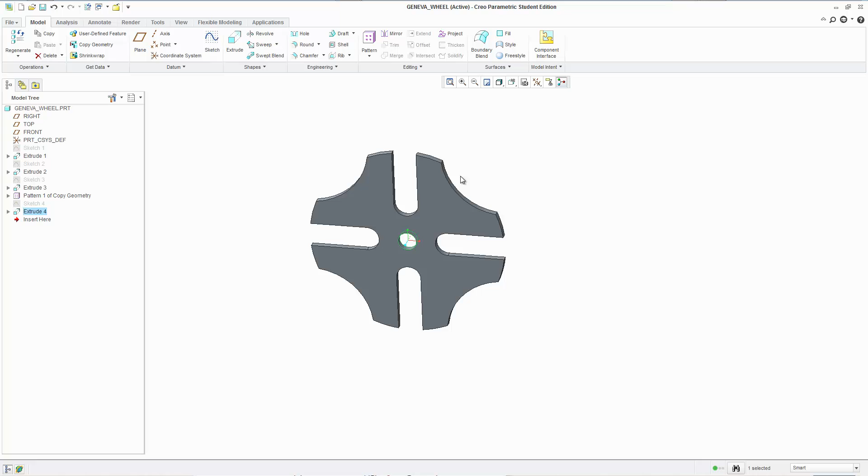And we're back. So this is part 2 of making these two wheels for the Geneva mechanism that we're gonna make. Again, I'm not gonna assemble it like this just yet. We're gonna do it definitely. So if this is something that looks interesting or fun to you, we're definitely gonna get to it.

And it's gonna be in the assembly series, and I'm gonna show you some other stuff too. I think we talked about doing motion skeletons. I'm going to show you how to do those as well. And if you don't know what that is, don't worry about it. But if you have done SolidWorks before and you're doing Creo, motion skeletons in Creo are what sketch blocks are in SolidWorks. So it's essentially the same thing.

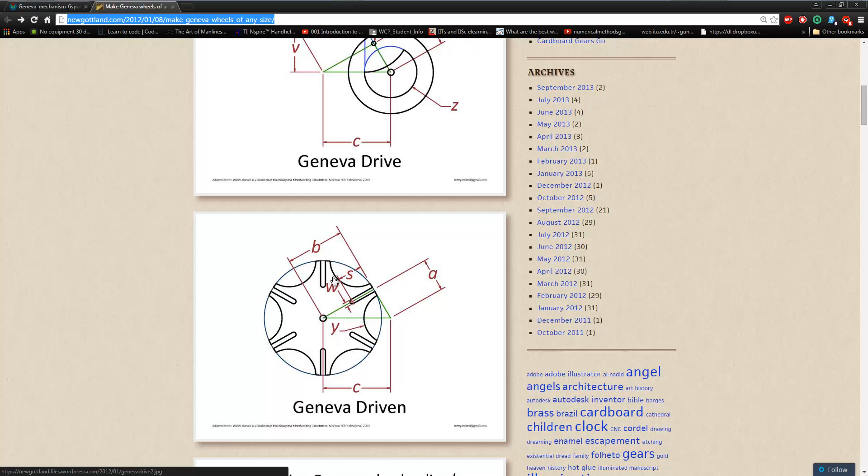But let's get to this. So now we're going to make the drive. I already have the dimensions calculated, I'm going to mention it again. This website is where I got all the equations for the calculations, just follow it along. I'm going to link it in this video as well. I've sent these people an email just telling them that I'm using this website. Hopefully they don't get angry, because they got some nice stuff here.

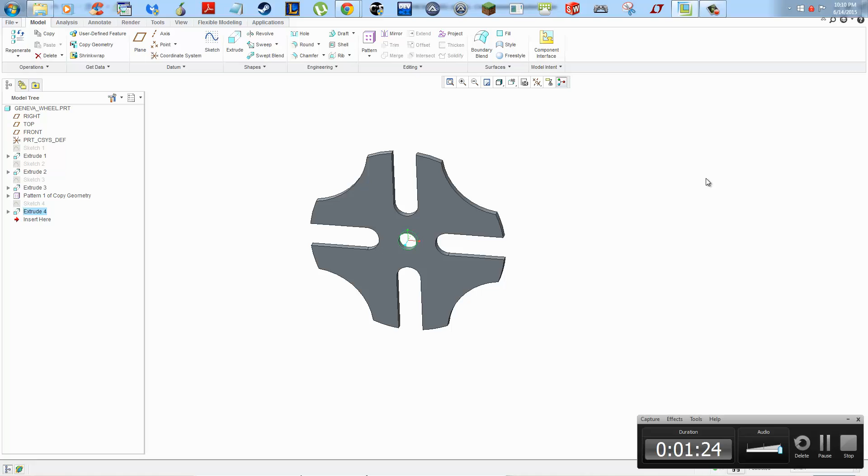Alright, okay. So that's not, alright, there we go. Minimize, let me just get rid of this. We'll make a new part and we'll call this drive. Geneva drive. I'm typing with one hand, so it's kind of slow. Alright, so, okay, Geneva drive. Let's make the part.

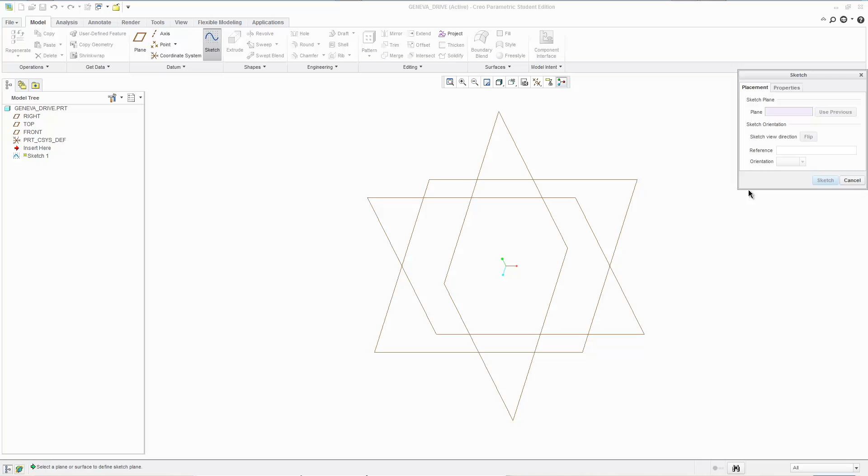I'm going to show that. Select a plane, this is my standard thing that I usually do. You change it to static, and that's like my routine before I do anything, because everybody has their little things they set up before they start modeling things, and this is mine. There's a few more things I'm going to show you in the advanced stuff to set up, but we'll worry about that when we get there.

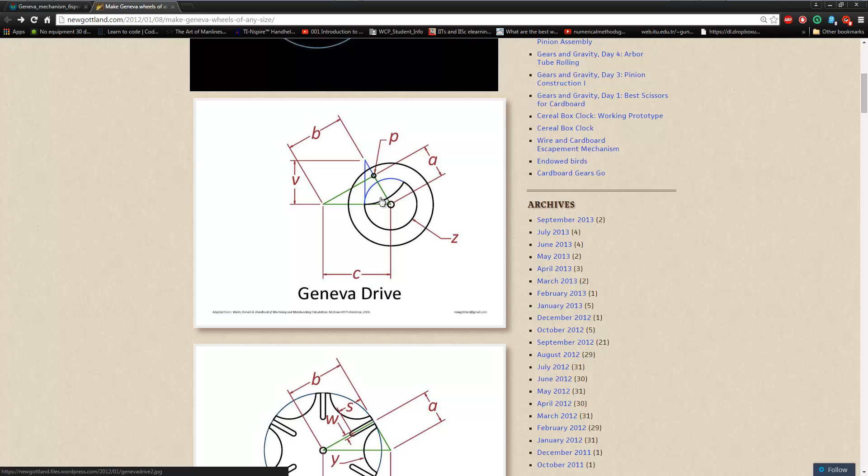Alright, so let's make that drive, the green side. I already have the calculations done, so I'm just gonna start modeling. Again, I recommend you make your own. So our outer radius. Oh, this is good. This is good to show, I guess.

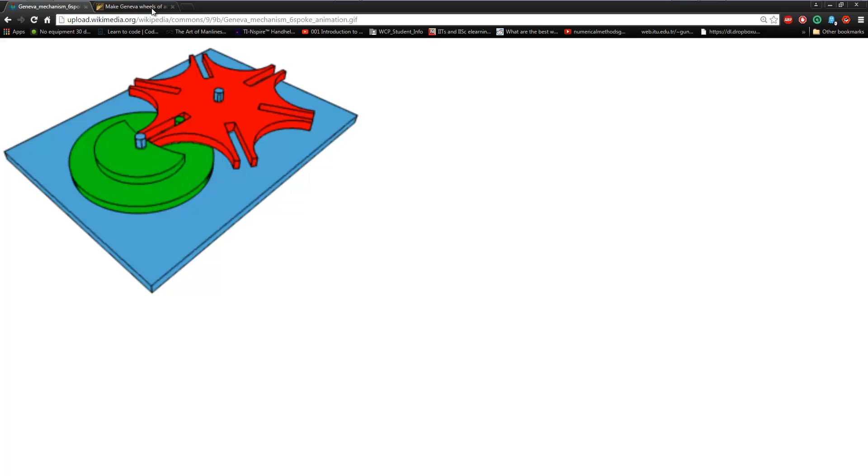So you see two layers here. We got this bottom layer, and then we have something that's on top of it. The diameter of the bottom layer is something that you decide as well, and it's not in these equations or parameters, so just be reasonable about it. The way I like to think about it is the diameter where this pin is placed. I just go about an inch or about an inch and a half further, because you have to take into account the diameter of the pin itself. So if you go an inch further, you only have like half an inch of clearance. So that's what I recommend.

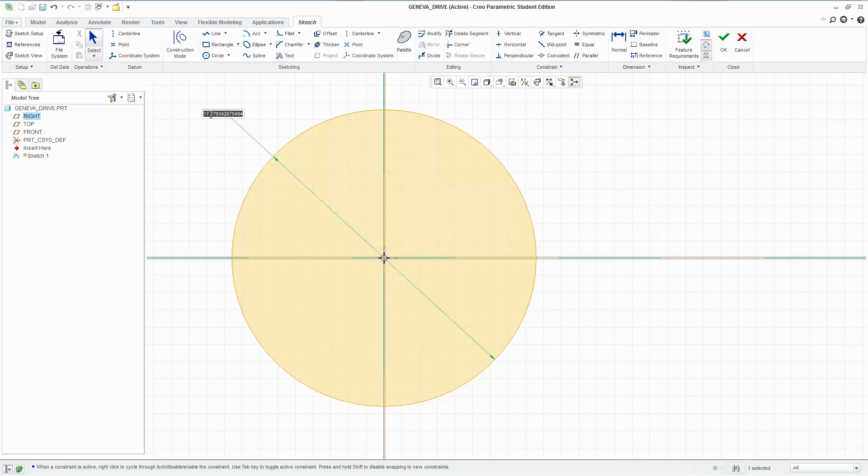But I'm gonna make the circle now, and let's make it to be... so we have 8, I'm gonna make it to be 10. 8 is the inner diameter. Okay. This is going to be the bottom part. I'm gonna make another line now using construction mode, and this is where the pin's gonna go.

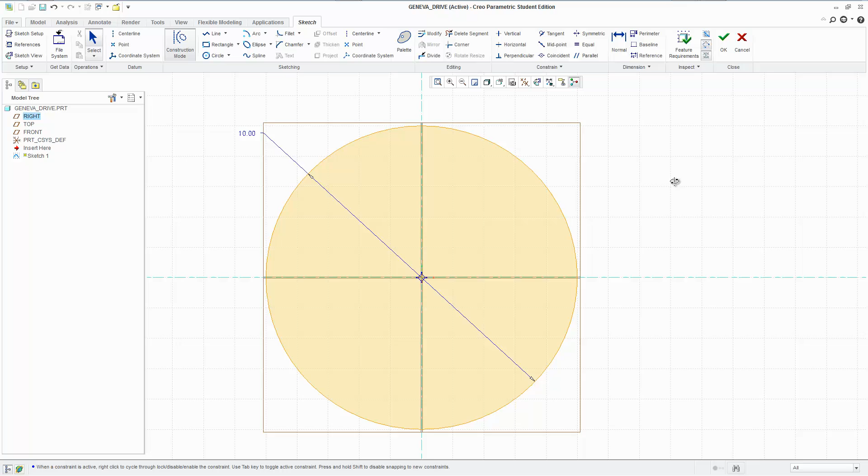Actually, before I do that, let me just make the bottom disc like we did last time. Extrude that out. 0.25, just arbitrarily picking a dimension, and then we're gonna sketch on this. Select the surface, select the face. If I'm doing this too fast for you, chances are you haven't seen the beginner tutorials.

Just follow along. The way I'm moving this around, hold down Control, then click middle mouse button and drag it. That's how you do this. You should already know how to do this. Middle mouse button, drag it around. That's that, and when you get lost, just click this. Okay, so...

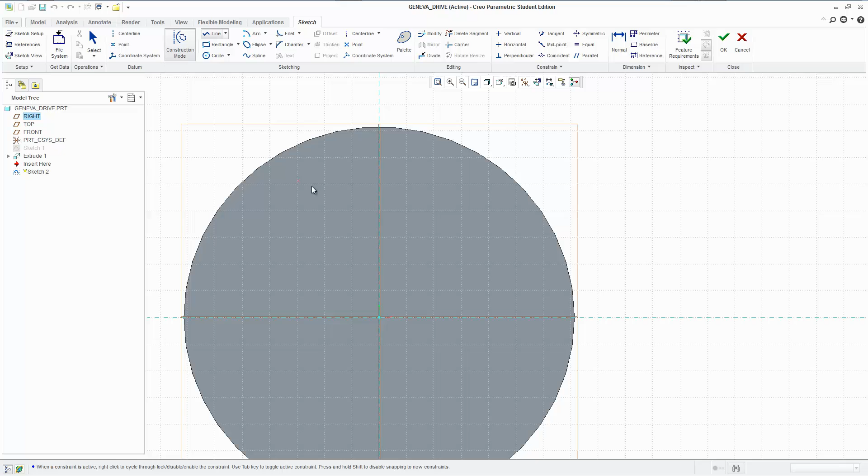Construction mode. Again, I'm going to select the reference, hold Alt, click the edge that you want the reference to be, and now we have this dimension, and I want it to be about 1 inch down, but that's not how we do it, is it?

I want it to be about 4 inches from the origin. Okay, that's that. So at this point I want to make the pin. Now I can turn off construction mode, and now it's gonna snap at the end of that line. And there we go. It's 1 for me. I don't know what it is for you, but it's 1 for me.

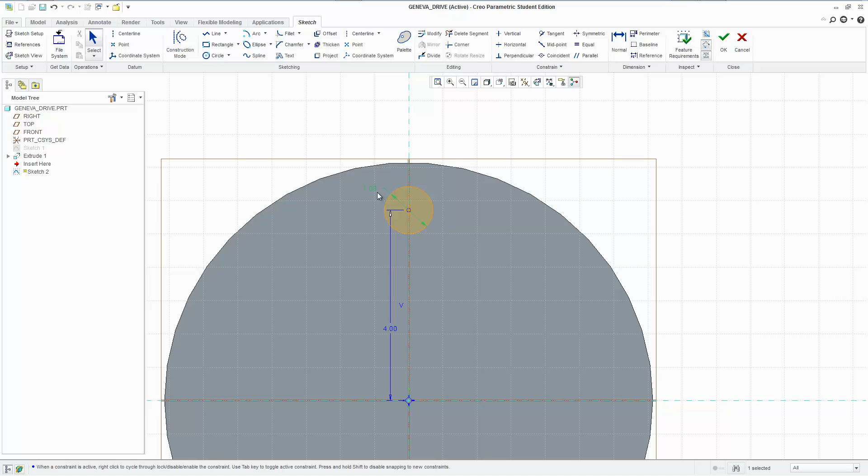So what I could do now is make the inner disk that's gonna have the connection. It's gonna interface with the wheel itself too, the middle part. But I'm not gonna do that—there's a reason for that, and once we get into assemblies, I'll explain what the reason is. Right now, it's good to not have too many extrusions within the same extrusion. It's better to do extrusions separately, because then it's easier to manipulate them, and when you get into assembly, it's easier to interact with them as well.

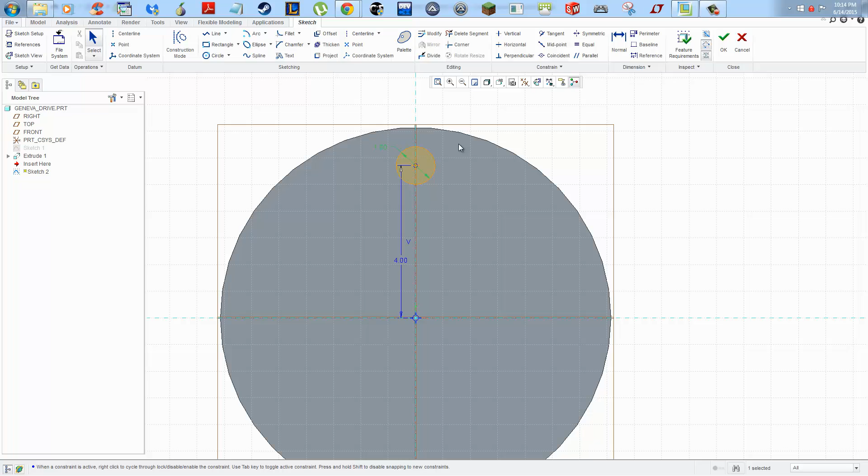So what we're gonna do is make this part separately. Let's just do this for now. I'm gonna have it extrude out about, let's say, 1/2 inch. Is that too small? 1 inch sounds good, looks good. And now I'm gonna create the other side.

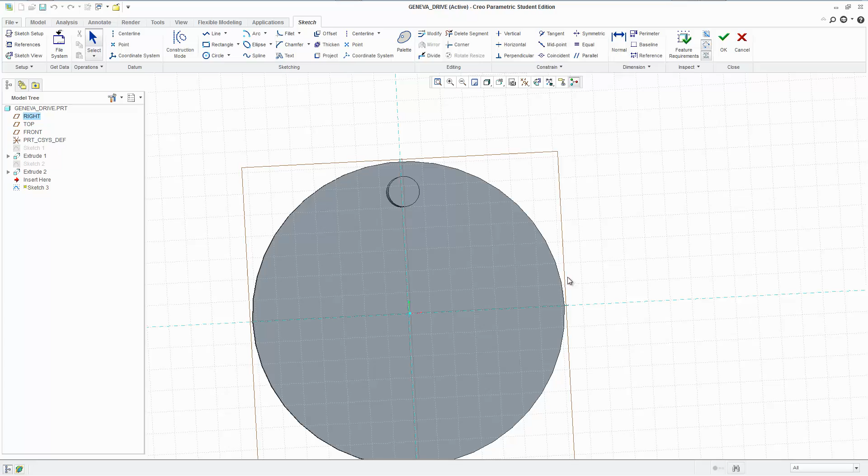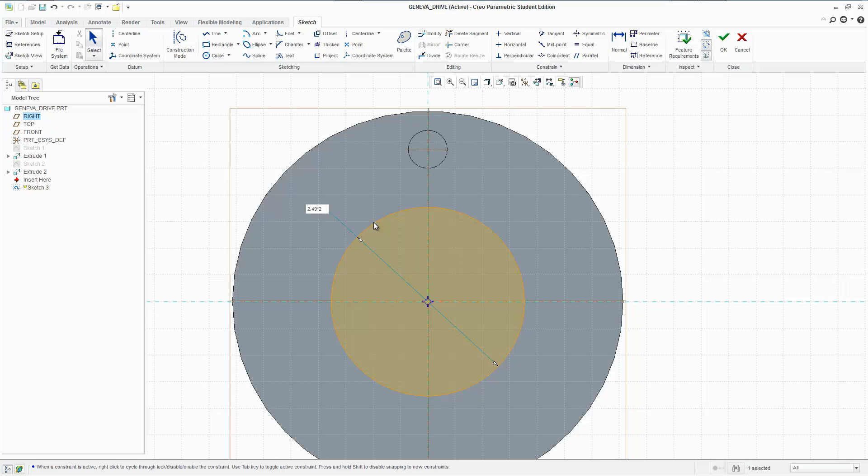So the radius of the inner wheel was something already calculated. For me, it was 2.49. And if you remember us making a cut into the wheel from the last video, that's exactly the size of that as well, and that's for a good reason, because that's what it's supposed to be—2.49 times 2. Another thing: in these dimensions you can have mathematical operations, so you can do 2.49 times 2, or plus 2.49, whatever you want to do. It can handle operations, so you can have parentheses in there too and all that stuff. It's a pretty nice feature.

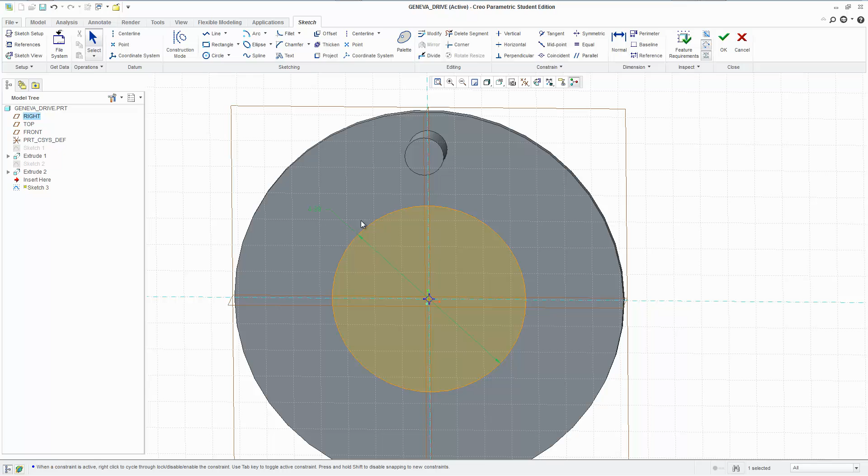I'm gonna leave it like this, and once we get into some of the advanced stuff, you'll see exactly how to set these up so you can produce many of these Geneva gears without having to create them over and over again. All you would have to do is just change a few dimensions, but that's for later. I know I'm saying a lot of stuff is for later, but trust me, it's coming and it's gonna be fun. But this is it for now.

Let's just extrude that out. Oh, nope, that's not it. If we remember, right here, there's a little slice in here. We're gonna have that slice cut. So let's go to the sketch again, edit definition.

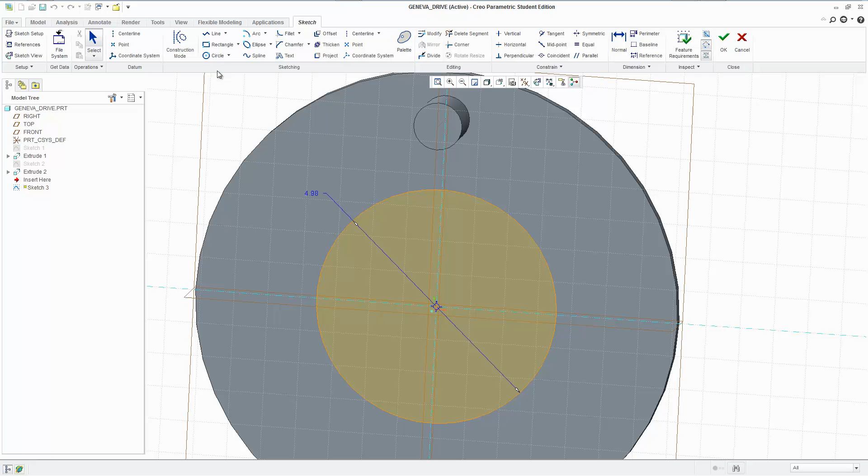I'm just kind of eyeballing this right now, and I'm gonna use the spline tool. It doesn't really matter whether it's too far down, as long as it doesn't interfere with the wheel. So if we look at this animation, this doesn't interfere with the wheel. It's far enough that this is allowed to rotate, and that's really the only crucial thing we have to keep in mind. It's not really important for any other purpose, because there isn't going to be much.

And again, if you're engineering students, you should understand this: there isn't going to be much force exerted by the wheel on this, because it's just stopping it. There's nothing really pushing against it—it's just there to hold it in place. So it doesn't have to be too thick. It's fine the way it is.

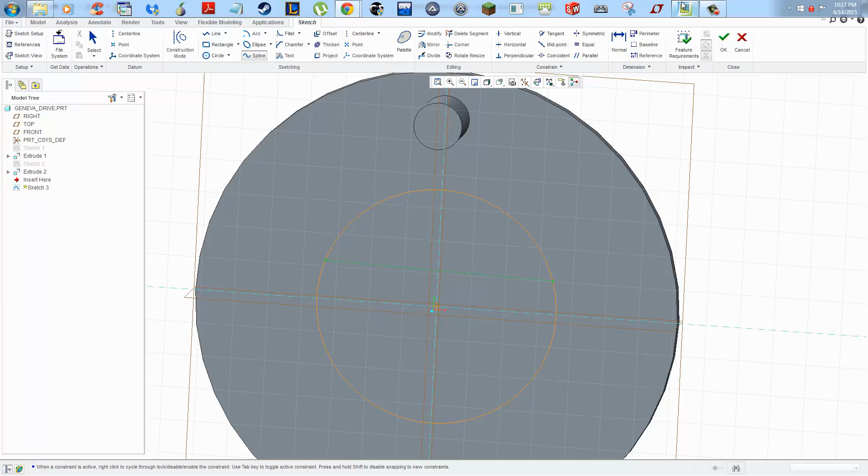You can even have something crazy like what I'm about to do now. So you can have something like this too if you want. We'll do that actually—why not?

Let me actually mess around with some constraints here. Okay, horizontal—make it horizontal. Make that horizontal. Oh, well, how about this? Let's try making it perpendicular. Whoa. Alright, well, that's not gonna... Oh, is this... Oh, because I made a spline, that's why. Okay.

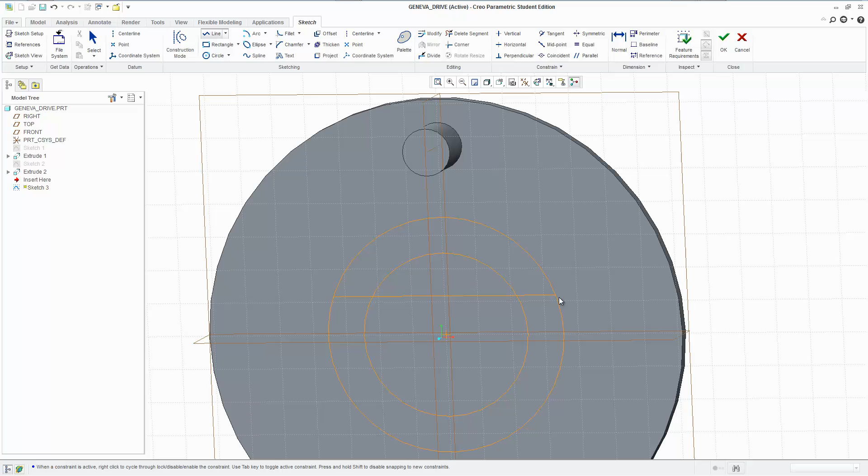Let's make this line right here, and we're gonna make it horizontal. That's that. We're gonna get rid of the extra stuff inside, and that's it. And we're gonna extrude that out.

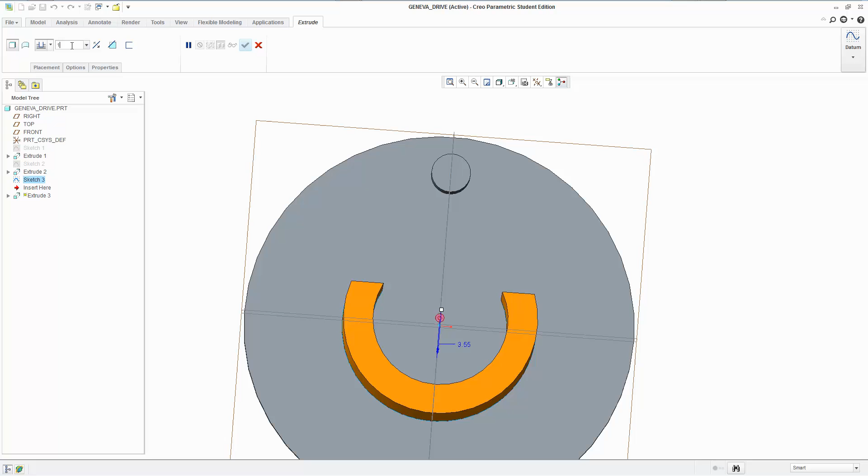So you can have something like this, though it doesn't have to be a solid piece. Let's make it the same as the other, the same as the pin. What was it, 1? Oh, it's 1. So it's gonna be, yeah, about 1, it's the same.

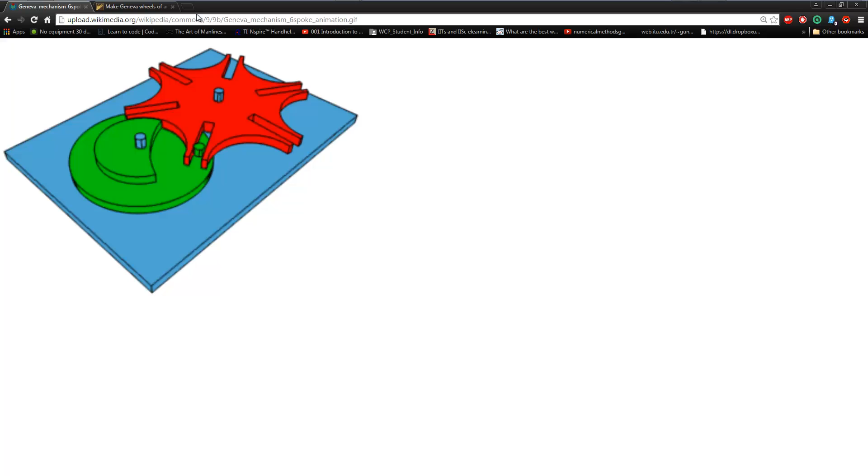And of course, as I said last time, we're gonna punch a hole through this, because this is the one that's gonna have a motor on it. When we get into the advanced stuff and I make this again, we're gonna have something called a key. You need keys in things like this. Well, you don't need it necessarily, depending on what you got, but keys are kind of required.

So let me just show you. That's not what I was looking for. Motor with key, that's, nope. Motor with shaft key. Okay, there we go. So just a little bit of lesson here.

Again, I hope these image people don't get, whoever owned this image, don't get angry at me. But this is something called the key, and this is gonna fit into a gear or something that's gonna have a slot for this to fit in, and that's how you would drive a gear.

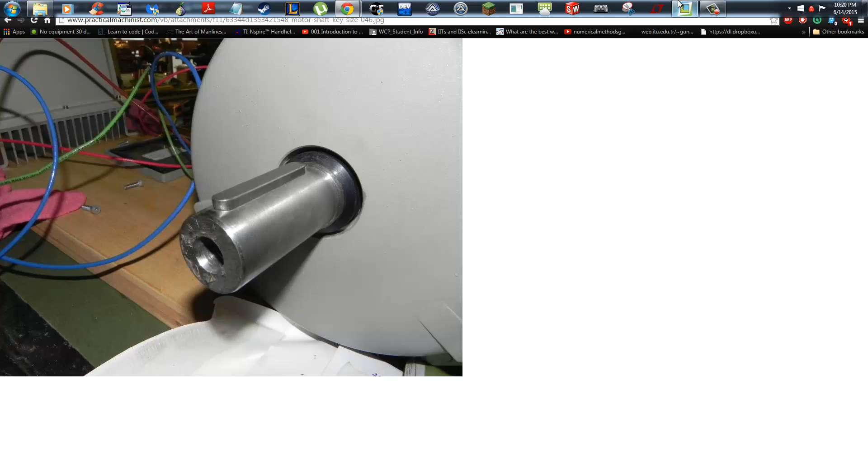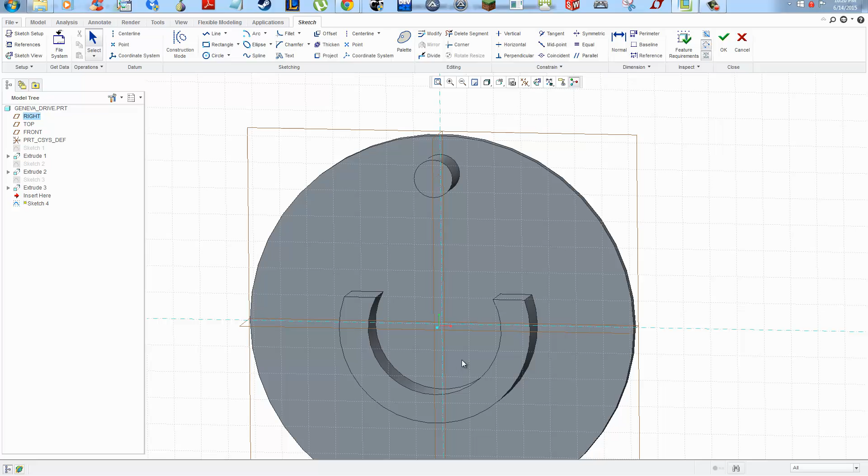Because otherwise, if you have just a straight random hole and you put a motor shaft in there, it's solely based on friction, and there could be a lot of slipping even if it's press fit. So it's good to have keys because it's nice to transmit power that way, and it's efficient. But we don't need to worry about that. That's just a digression. I'm gonna do a lot of those.

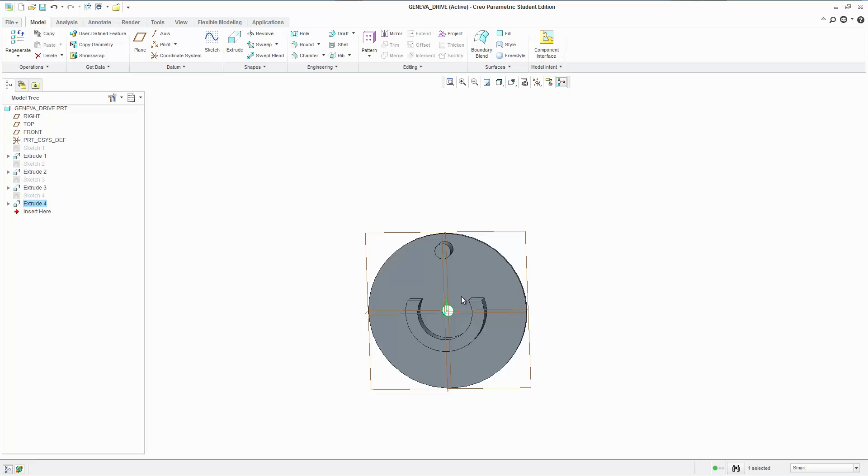So 0.75, punch a hole the other way to the surface, and that's it. So now we have the two components that we need to have a Geneva mechanism. This is a valid Geneva mechanism, even though we have just this thing going around it. And realistically, I think this will be made.

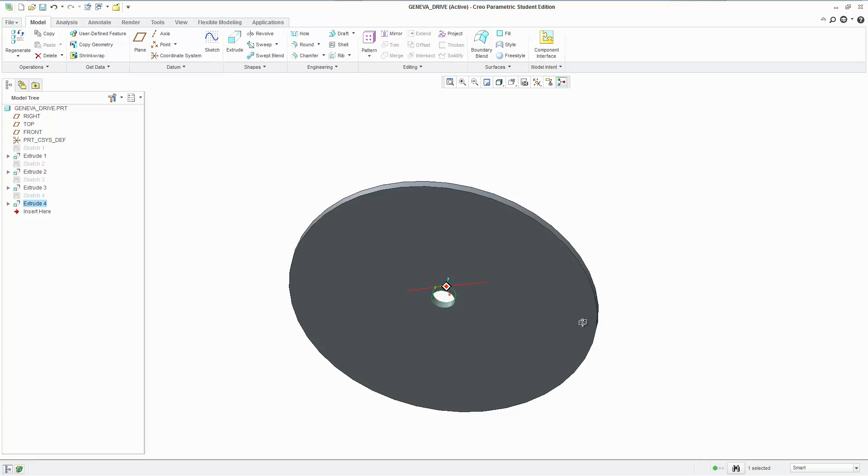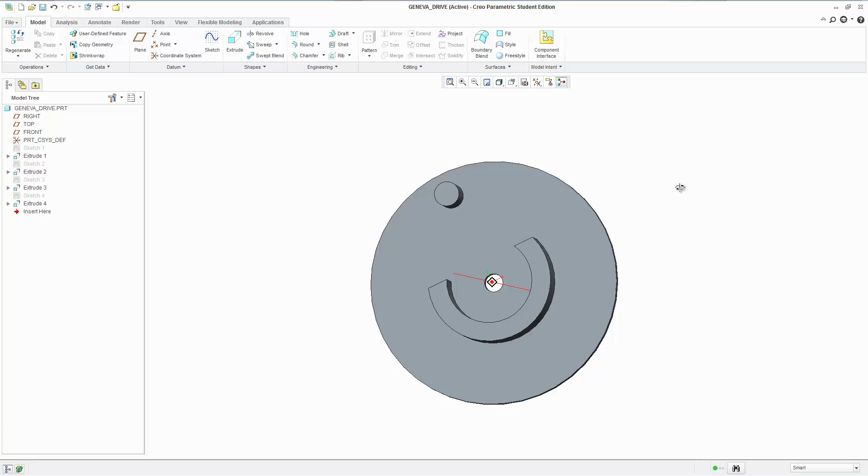I'm talking about this because when you design, just because you can make extrusions and you can make things, doesn't mean that it's possible to fabricate those things. You have to keep in mind that whatever you make in CAD, it's gonna be fabricated, and you're making it for fabrication. So if you make some impossible looking curves that are going to be very expensive to fabricate, you should try to remedy that.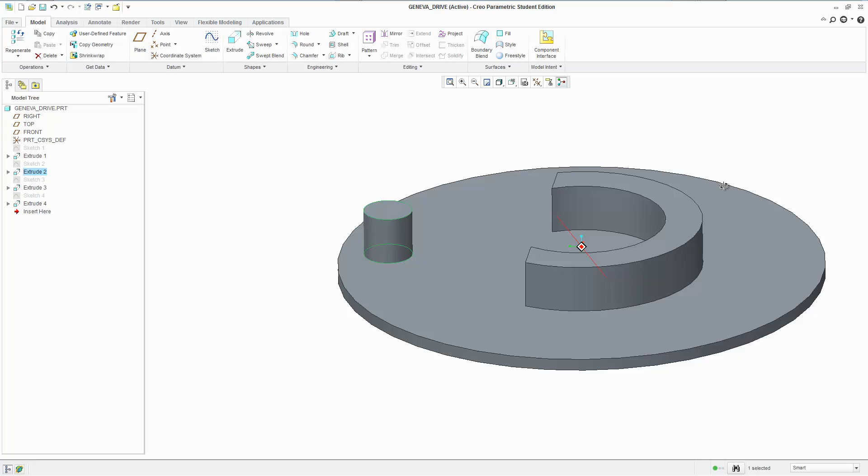I think this is fairly easy to fabricate, because you're gonna start out with essentially a disc that's going from this lower end to this point, and then cut into it. You would fabricate this using a CNC machine of some sort, and that's how you would do it.

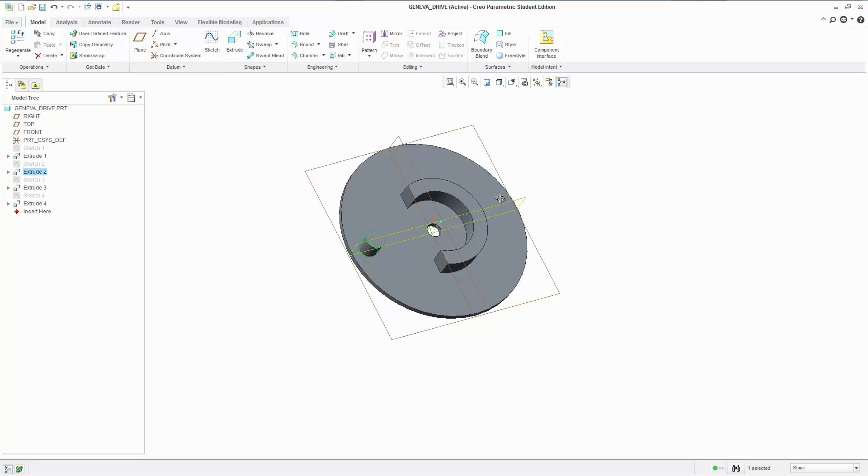Same thing with the other thing we made. Let me just open that up. That is not where I was. Where was I? Beginner 8. Alright, well, whatever. The other Geneva wheel that we made, it would be done the same way. Let's just look at this. You would have a CNC machine coming down and taking all these parts away, and that's how you would fabricate it.

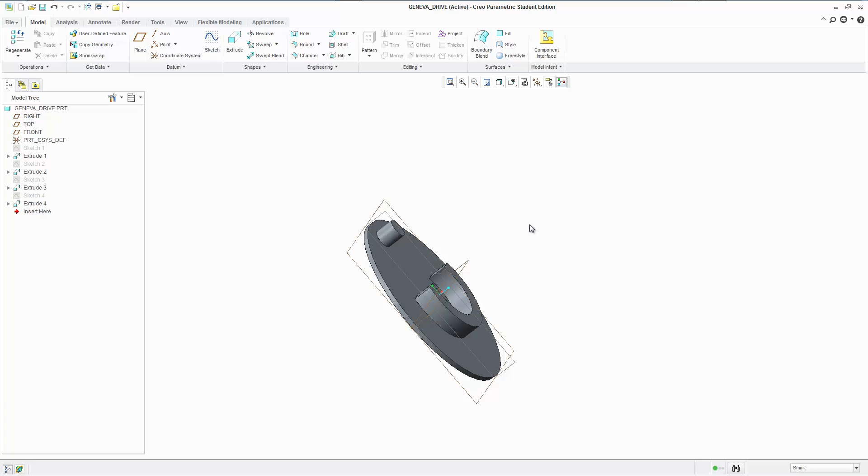That's just a little thing I wanted to mention, to keep in mind that you should model with the idea of actual fabrication in mind. Don't just randomly start making crazy curves and sweeps all across the places and think that it's something you can fabricate, because it could be unrealistic.

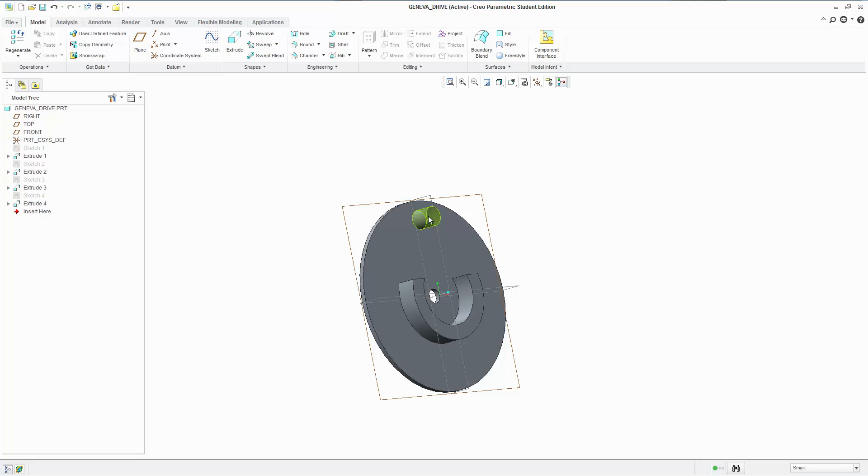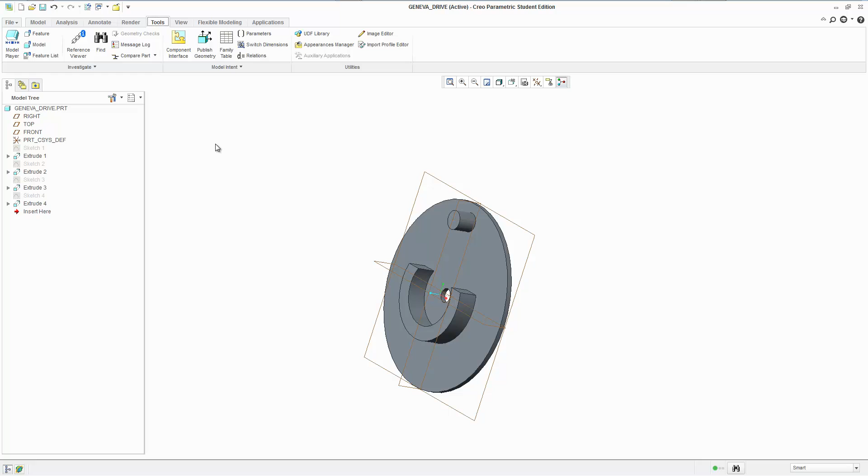But this is gonna end our beginner series. So I went over just the basic tools, how to use them, and I've kind of showed you how to make some realistic parts, not mechanisms really, because we're gonna get into mechanisms soon, in the next video, next series, or the series after that. I might want to go into parts modeling a bit more in-depth, stuff like parameters, but for now I think this is good, and I'm gonna stop this.